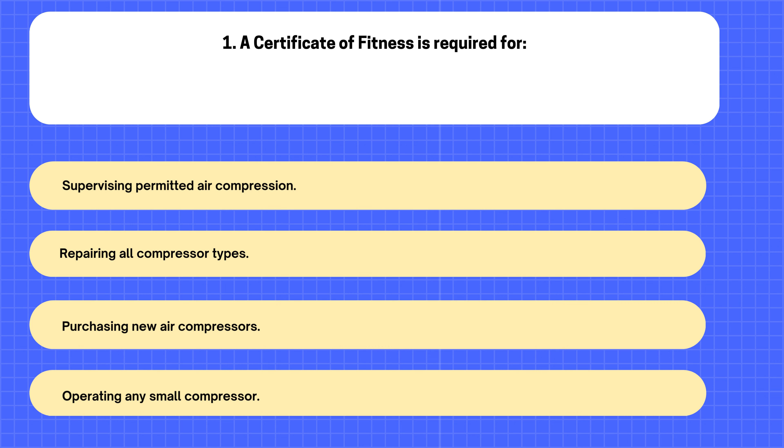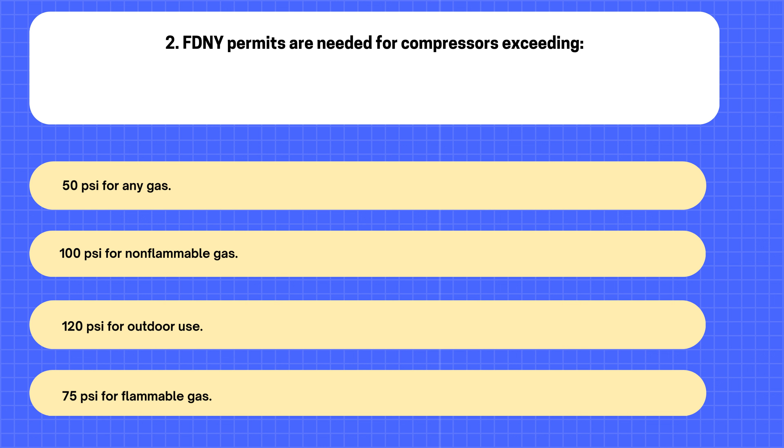2. FDNY permits are needed for compressors exceeding A. 50 psi for any gas. B. 100 psi for non-flammable gas. C. 120 psi for outdoor use. D. 75 psi for flammable gas.

3. Outdoor air compressing generally does not require A. An operator present nearby. B. Daily maintenance checks done. C. An FDNY permit issued. D. A safety inspection always.

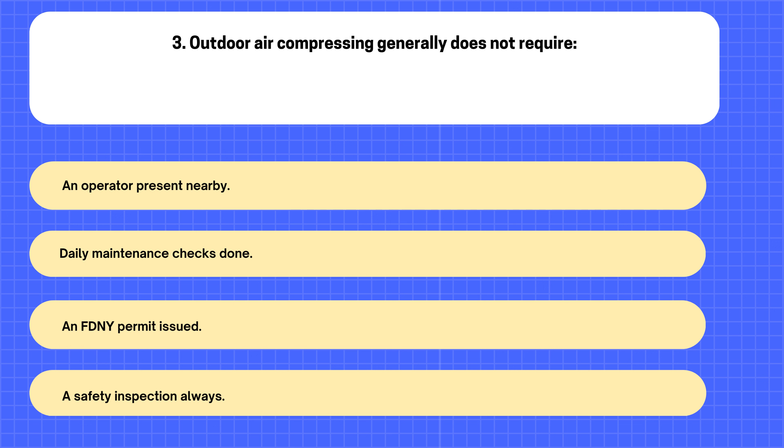4. Supervision of permitted air compressing can be A. Waived for small units. B. Remote via camera only. C. By any trained employee. D. Personal or general always.

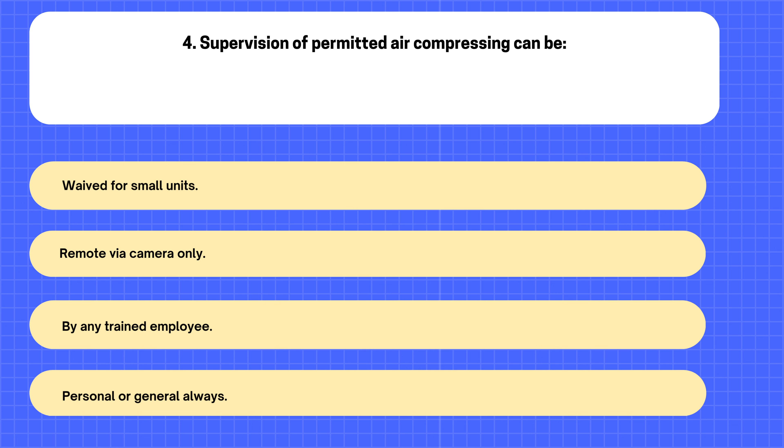5. Flammable gases in a service station tend to A. Settle near the floor. B. Rise towards the ceiling. C. Mix evenly with air. D. Dissipate very quickly now.

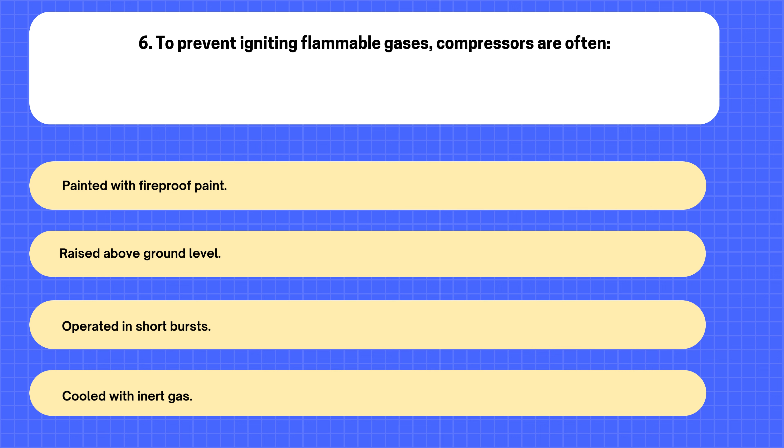6. To prevent igniting flammable gases, compressors are often A. Painted with fireproof paint. B. Raised above ground level. C. Operated in short bursts. D. Cooled with inert gas.

7. The minimum height to raise compressors in some areas is A. 2 feet above ground. B. 4 feet above ground. C. 5 feet above ground. D. 3 feet above ground.

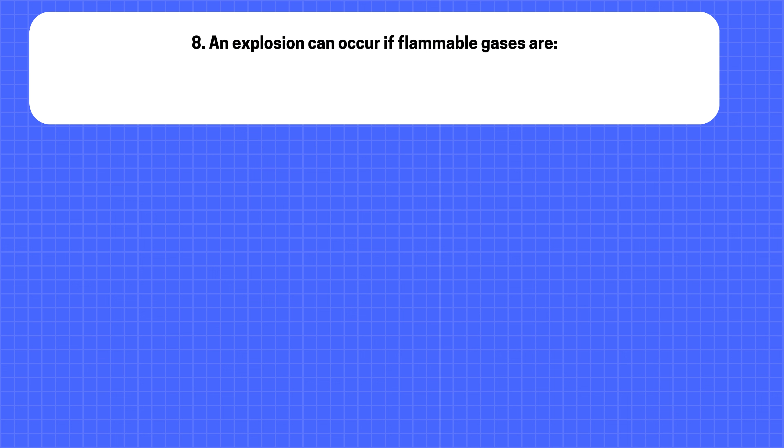8. An explosion can occur if flammable gases are A. Mixed with lubricating oil. B. Drawn into the compressor. C. Vented to open atmosphere. D. Cooled too rapidly now.

9. The A35 Certificate of Fitness incorporates sections from A. G35 and W11 COFs. B. P51 and G60 COFs. C. F60 and S12 COFs. D. W12 and S95 COFs.

10. The primary purpose of an air compressor system is A. Cooling industrial machinery parts. B. Storing pressurized air safely. C. Generating electrical power supply. D. Filtering ambient room air.

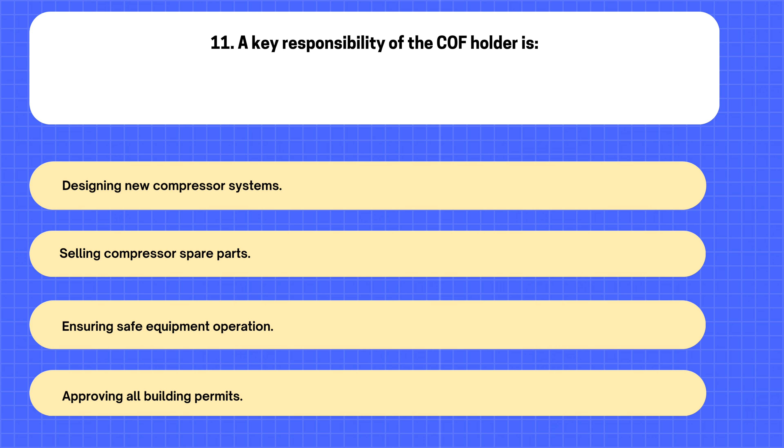11. A key responsibility of the COF holder is A. Designing new compressor systems. B. Selling compressor spare parts. C. Ensuring safe equipment operation. D. Approving all building permits.

12. If a compressor is used for corrosive gas over 100 psi, A. No permit is needed. B. An EPA permit is needed. C. A DOB permit is needed. D. An FDNY permit is required.

13. The term air receiver is also known as A. An air tank container. B. The compression cylinder unit. C. The motor housing component. D. The primary air filter.

14. The most common power source for air compressors is A. A large steam turbine. B. An electric motor unit. C. A gasoline internal engine. D. A diesel power generator.

15. General supervision by a COF holder means A. Being always physically present. B. Only checking at shift end. C. Overseeing operations responsibly always. D. Training new users daily.

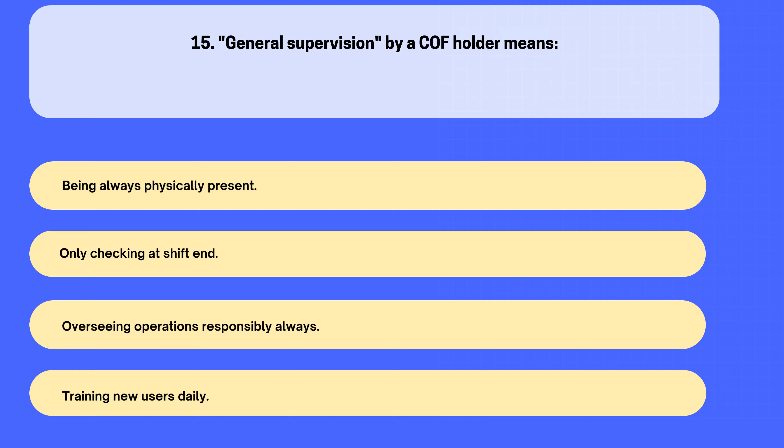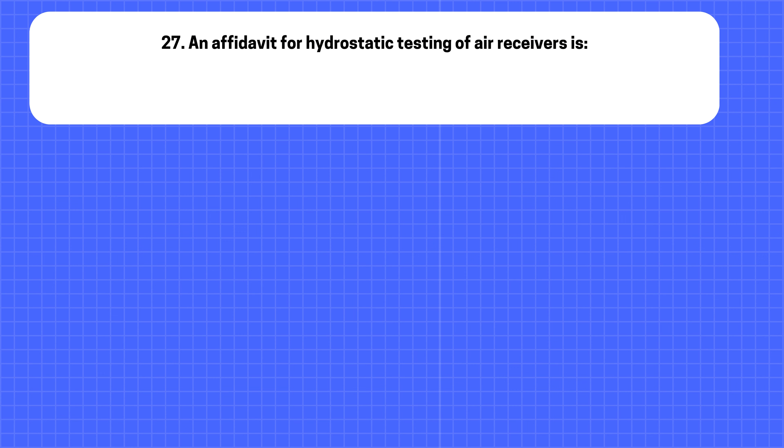27. An affidavit for hydrostatic testing of air receivers is A. No longer required now. B. Required annually by FDNY. C. Submitted to the DOB. D. Needed for new installations.